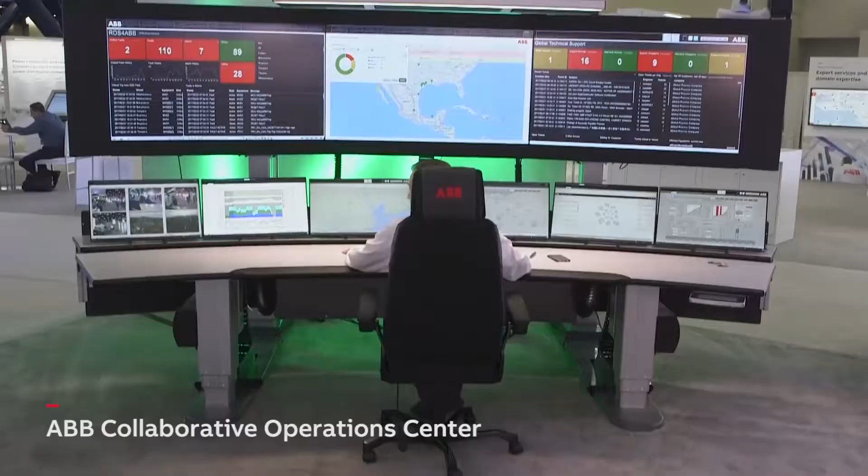What you have over here is a typical setup for our Collaborative Operations Center with our customer. He would typically be looking at the sites that he's responsible for, along with a case management system that shows him the items that are in stress, in critical state, and the assets that are in need of attention. So it's a quick dashboard.

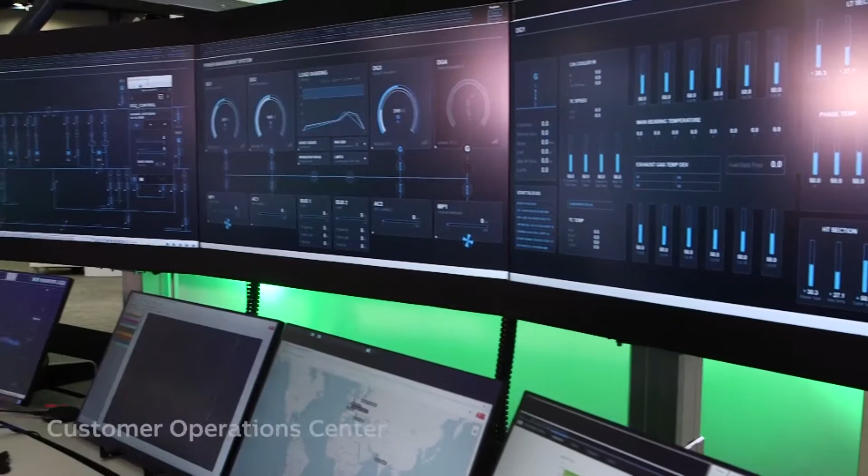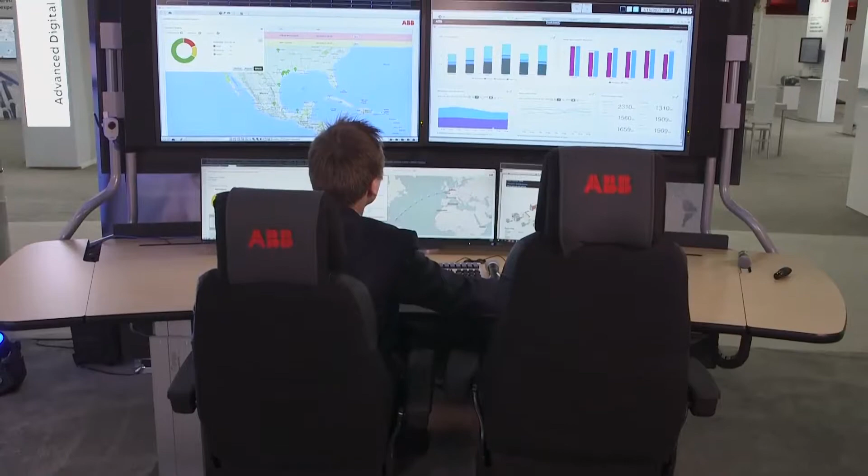That's his typical day. We have a customer site where the customer is looking at the same information periodically with ABB's help, solving the problems and getting to the root of the problem. And then we have a headquarters site where they're looking at data more about plant performance, allowing them to make decisions about moving production and optimizing their production.

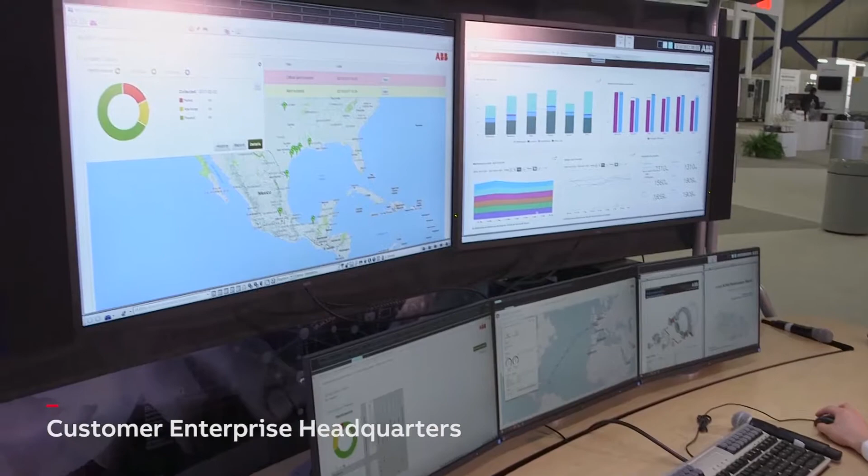We've been doing this for years. We have customers all around the world in all industries. This demonstration is generic, which would apply to any industry about critical assets.

So I'd like to take you now to another place. I'd like to take you to a world of data, a world of insights, a world of analytics. It's the Internet of Things, Services, and People. We call it the collaboration zone. So take a look.

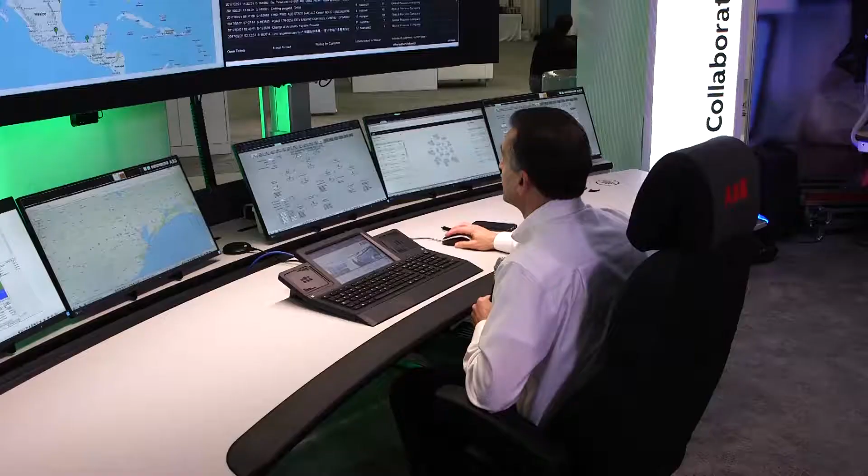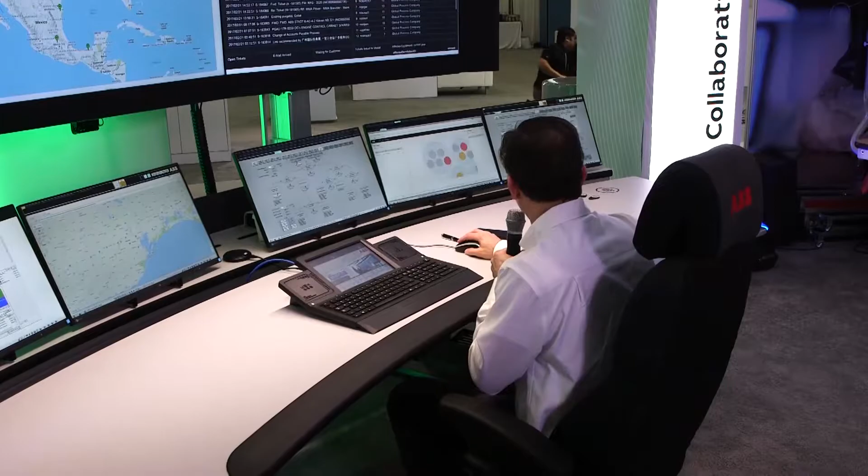Yellow level. Uh-oh. Alert on valve 301 at Global Industries. We've got a customer in trouble. Let me drill down into their system. This is strange, I haven't seen this problem before. I better call ABB to get some help.

I've got someone calling me from the site. Hello, Steve Burt, ABB Operations Center. Hi Steve, this is Kenneth from Villahermosa. I just received an alarm on my system. I hope you have the same. I'm not really able to find the root cause here. Maybe you can give me some support.

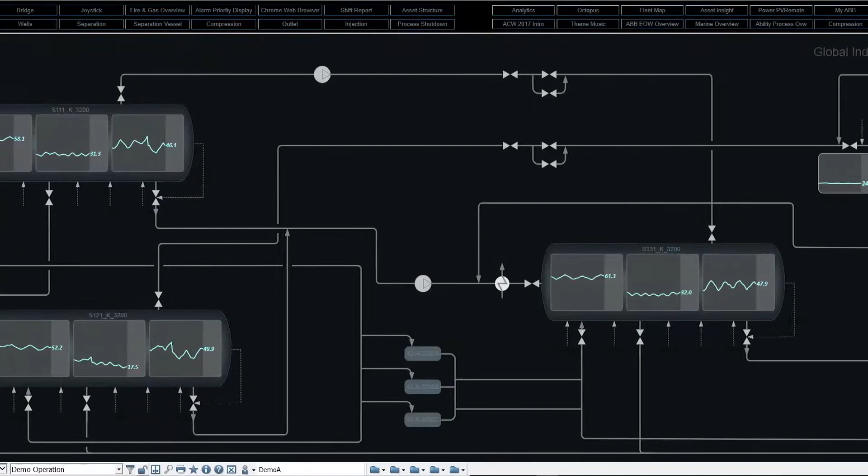Yeah, Kenneth, we got an alert here as well, and I've got your graphics up. Let's drill down into that alarm and take a quick look. Oh, you've got a valve swinging all over the place. I don't know what's going on there. I believe we have a camera on that valve, and we can call it up and do a visual inspection. So if we go over to the main screen where the valve is blinking, click on that, and go into camera view. Yeah, I'm opening up here.

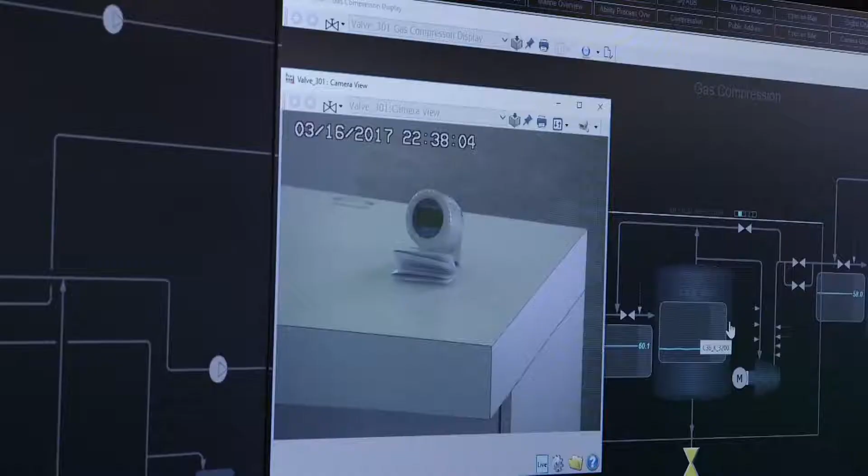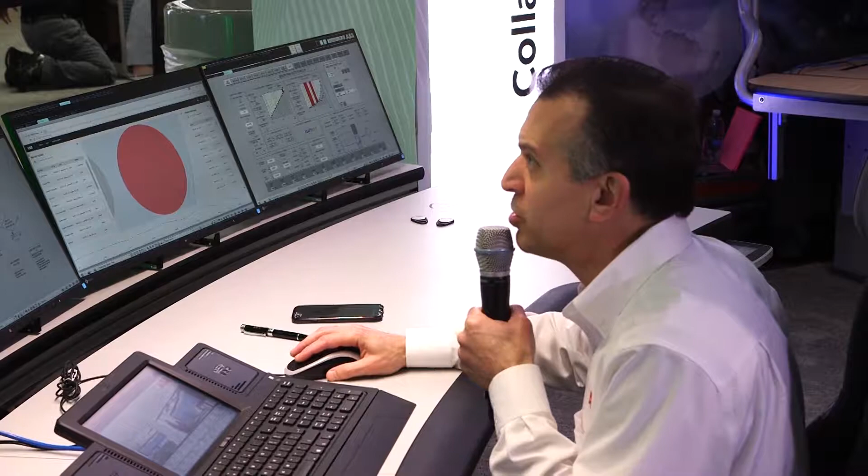You know, the valve looks all right. There's nothing outwardly wrong with it. What I can do, Kenneth, is I can get one of our service technicians in there tomorrow, take a look at it, and see if we've got to repair it or if we need to replace it. Will that work for you? Yeah, that would be great. Last time we had an issue, we were down for 2 days, and we lost millions, so we don't want that to happen. Exactly. Okay, I'll schedule that for tomorrow. Great, thank you very much.

Okay, so what you just witnessed in that first scene was a failure of a typical asset, a valve that was about to fail. And ABB and the customer collaborated and worked together to do something to prevent that failure.

But what about a critical asset? What about an asset where a failure might only occur every 5 years? We have analytics on those types of assets as well, and that's the type of troubleshooting we'll see in the next scene. Let's take a look.

Hey, Kenneth, hold on. Degradation on compressor C36 K3200 at Global Industries. Looks like we got another alarm coming in from a compressor that's downstream from that valve. Do you see that? Yeah, I can see it there as well. Okay, Leah, let's drill down into that and see what's going on.

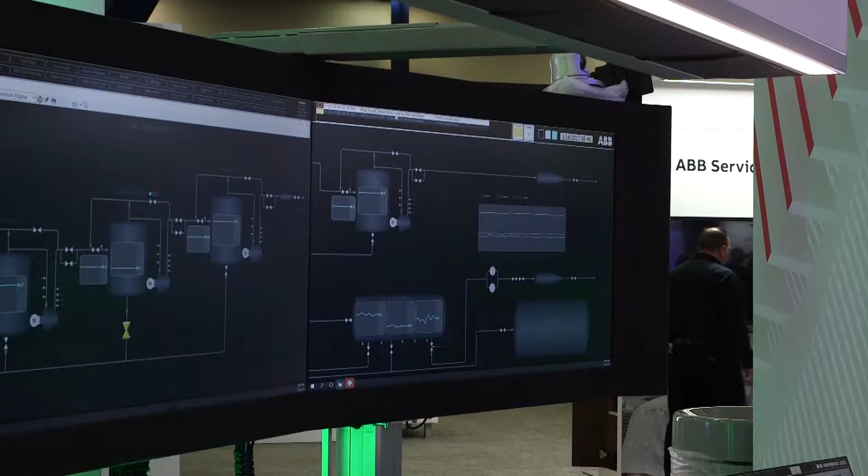Okay, let me open here. Okay, I'm opening it. Yeah, I'm looking at the performance map. It doesn't look good, it looks like it's extremely noisy. Let's go look at the asset reporter for that compressor.

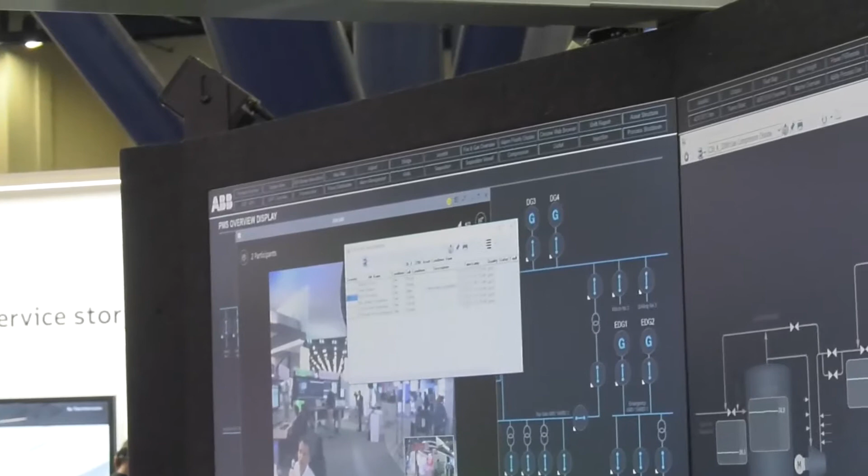You just click on the eye. Okay, straight on the graphic here. Okay, yeah, that brings up the reporter. And if we look at the main performance alarm there and click on that, we can drill down a little bit further.

Yeah, I can see it here. Condition doesn't look good. It's really running close to operational limits. I know we have some analytics on that compressor. Let me bring in one of our analytics experts who can help us with this.

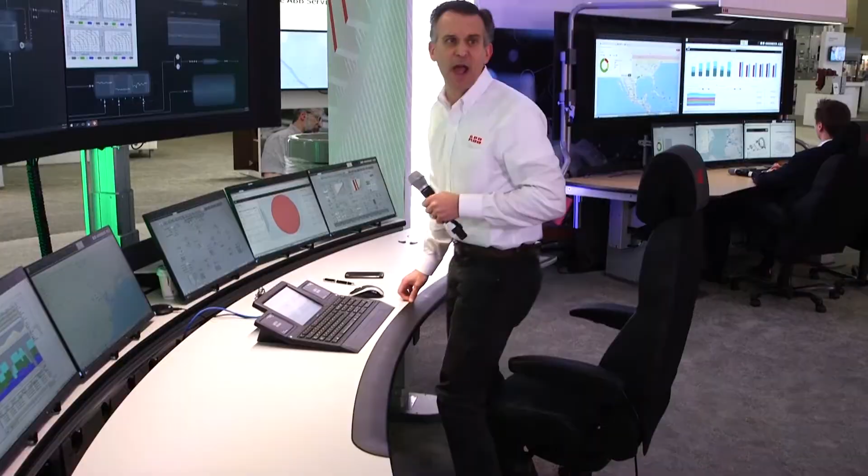I'm not as comfortable drilling down here. Can you hold on for a sec? Sure, okay, let me call him. Hey Kevin, can you come on over? Hey Steve, hey, what do we got?

I've got a problem down in Mexico at Global Industries. We've got a compressor that's starting alarm, and I'm not sure about the analytics. Can you drill down into this?

Yeah sure. Hey Kenneth, it looks like you got some issues. You've had some alarms. Now we need to dig into the analytics, all right? Now you're plugged in. Come into the analytics button and we'll take a look at that.

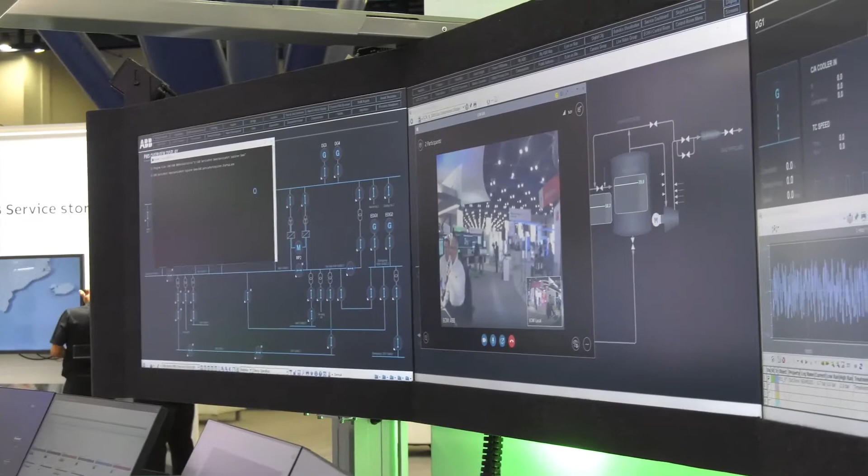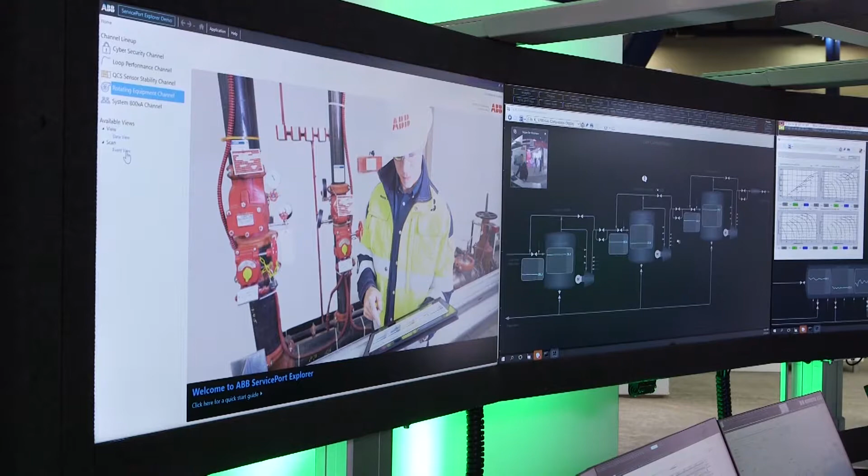We have all the high-resolution data captured, and we've aligned that with performance measures so we can ascertain what's causing this. In your case, you got a rotating equipment issue. Why don't we click on that and move over to the KPI view, the performance indices, where we can look at the profile for this particular asset class.

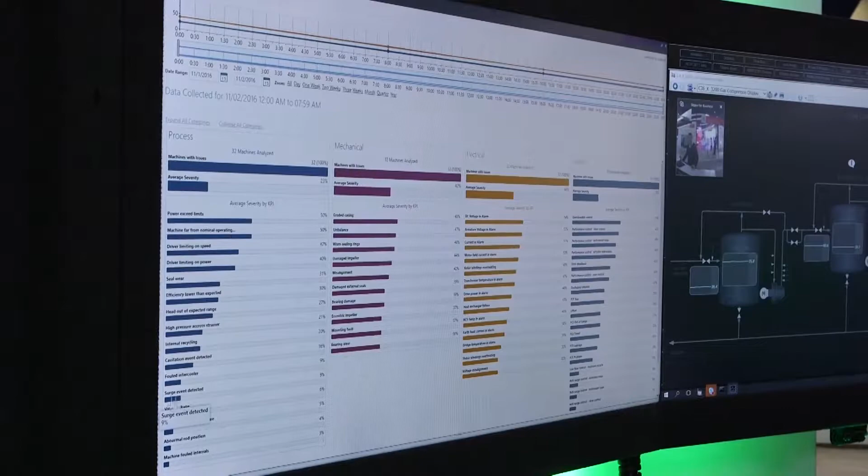Yeah, there's a lot going on here. I'm suspecting this surge event. You see that one that says surge event detected? Yeah, something about 9%. Yeah, here, that's usually at 0. I know there's a lot on here, but there's a profile, and this should be 0.

So if we click on that, it'll help us dig right into the raw data that's causing us the issues. So this first one is pegged at 100. So let's click on it and see what it shows us. This allows us to sync the data with the KPI so we can exactly see what we're doing.

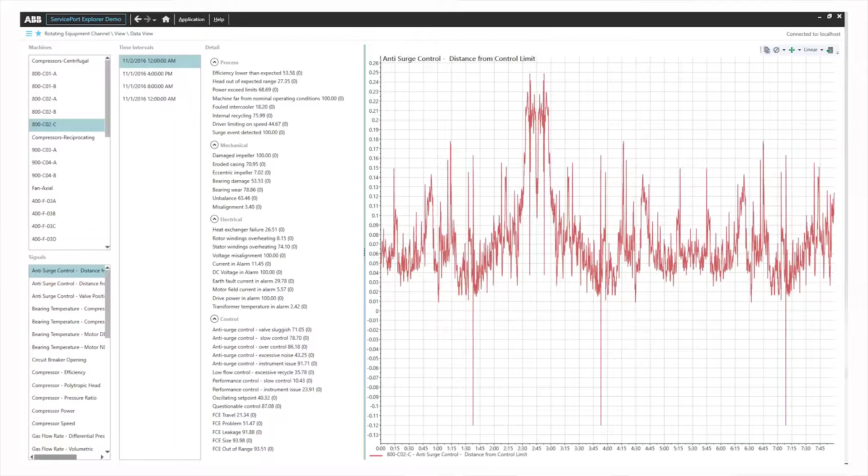Oh look at that, see this surge here? This surge in the middle, it's above the noise floor. You've got this surge that aligns with the alarm and your dots here. So that's what you're seeing. So now we know that it's true, it's not a false positive, so we don't want to be chasing rabbits.

But now let's see if we can use the data analytics and navigate to try to find the problem. Let's do some mining, so let's jump back over here to this loops channel. I'm suspecting that you've got an intermittent disturbance. That's what it looks like.

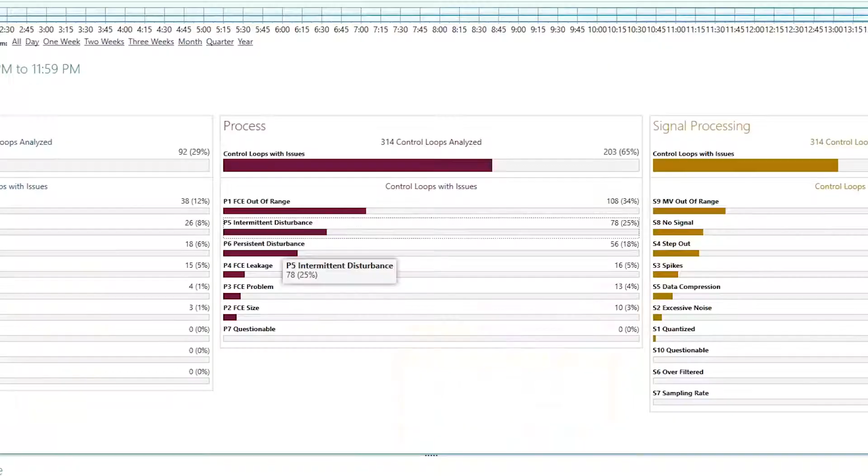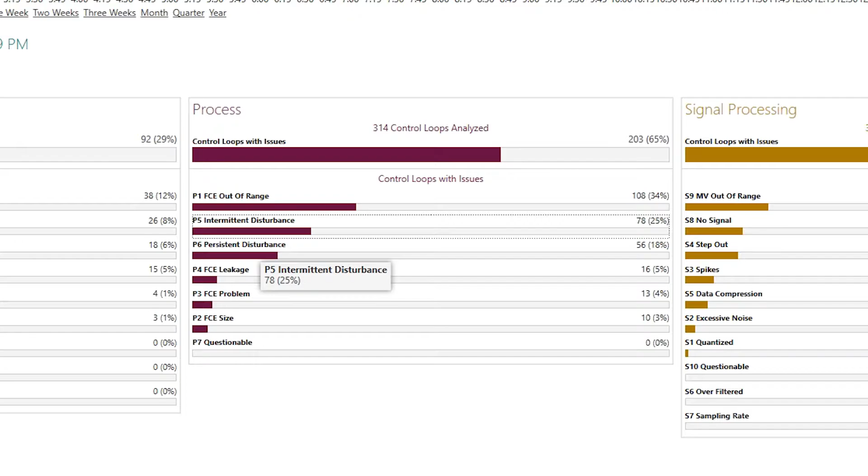So if I go to the event view, go to the process area, and that second KPI, the one called P5, intermittent disturbance, there's a lot going on here. There's a lot of shaking going on. So let's go in here, and I can see, oh looky here, this 739.

Oh there you go, Steve. That's in another area of your plant connected through a header to this particular compressor. So it's very likely someone might be messing with that loop, causing this problem. They don't even know they're doing it.

So let's, like we did before, click on that KPI and look at the raw data just to get that visual value. Yeah, look at that, it's oscillating. This is aligned with that pulse. This is causing you your trip.

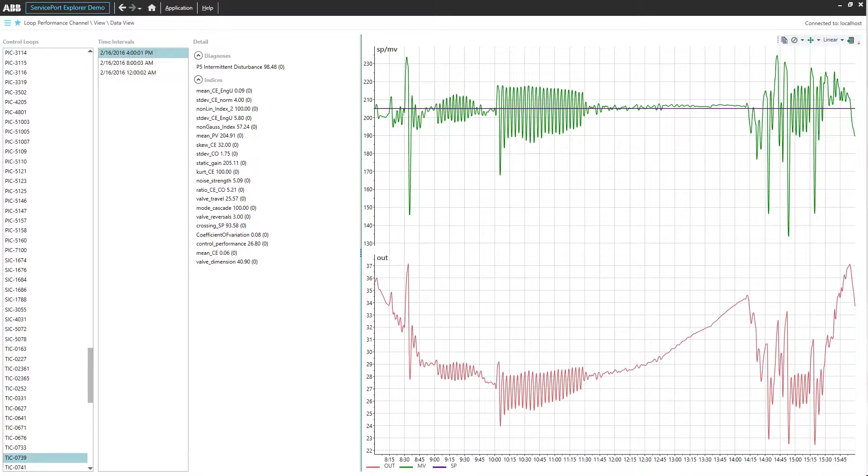So there could be something wrong with this, but you've already done a visual inspection. My guess is just somebody's flipped this loop from auto to manual. I can see you have access rights, so could you dig in there and just make sure it's in manual? And if it is, flip it back to auto.

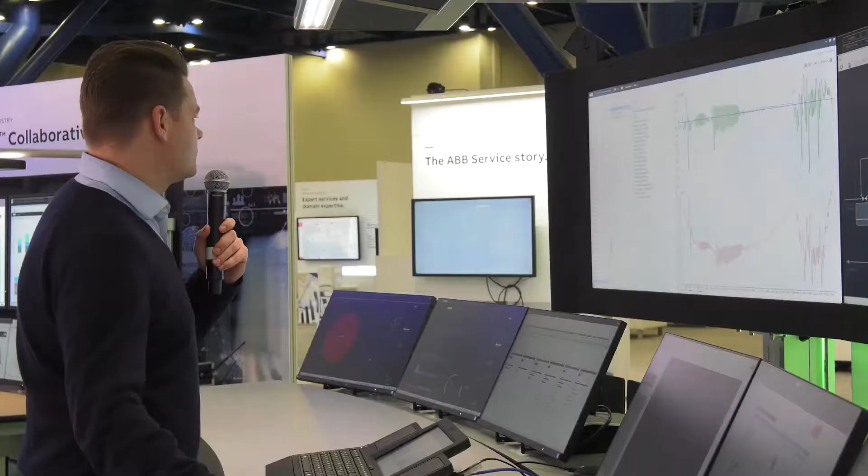Yeah, let me see here. This should be valve 302, I think. Yeah, right there, open the faceplate. Yeah, you're right, it's actually in manual mode here. Let me try putting it back in auto.

Yeah, in the old days, I'd have had to fly into site, and this would have tripped. So we've done this in seconds. Very good, hey, I see you did it, it's in auto now. Can we look at the trend? Okay, opening trend display, call up the trend display. Now we can come over here and look.

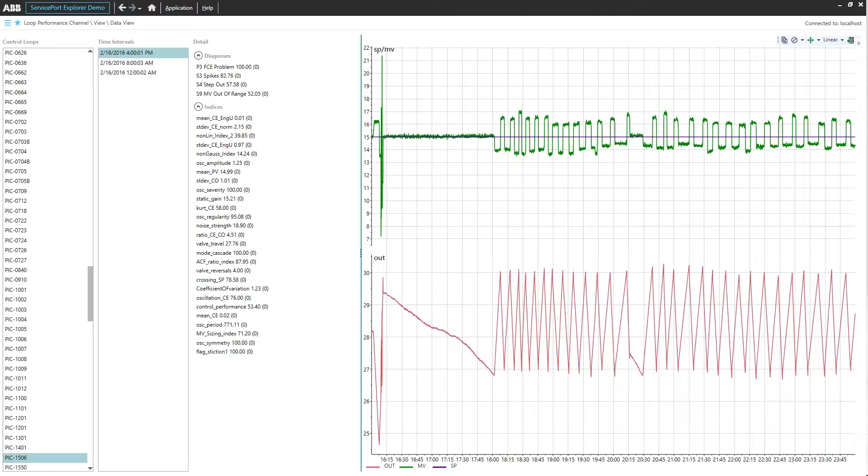Hey, looky there. That's what we like to see. You did the right thing. You called us just in time. And this is such a clear example of where you had an issue, an alarm, a related process, and a causality, and we solved it.

Let's go ahead and plug this into the predictive notification so we can capture this knowledge for the next guy. I'm also noticing as I'm poking around on your system, there's a lot of things that are wiggling around, and I really think a loop performance fingerprint would really help you guys. I see you have a contract, so let's go ahead and schedule one of those. You have over 400 assets. Let's make sure that we don't have any problems.

It sounded a great idea. You know, we had an incident a couple of weeks ago, and this we really want to be more proactive with. So, yeah, right, sign me up on that one. All right, great. Will do.

Okay, so what you just witnessed in that scene was a potential failure of a critical asset. ABB and the customer collaborated, looked at the analytics, and quickly got to the root of the problem. So they made it look easy, but the challenge behind all that was that we are analyzing the data, presenting the customer and ABB with meaningful information, actionable information, so they can quickly act and solve the problem before it occurs. So now let's flash forward two weeks to where that engineering manager and the operations manager at headquarters are

looking at data in a meaningful way for them. They want to look at plant operations, make decisions on moving production, and have a discussion based on how that plant is performing. So let's take a look at that.

So Marco, I got this notification on my phone about the compressor at Villahermosa. This worries me a bit. The last time we had a problem with the compressor, we were down for four days and lost more than two million. In fact, they had so many problems at that site last year that we were considering consolidating operations and moving production from that site somewhere else. Can you tell me what happened this time? Did they sort it out?

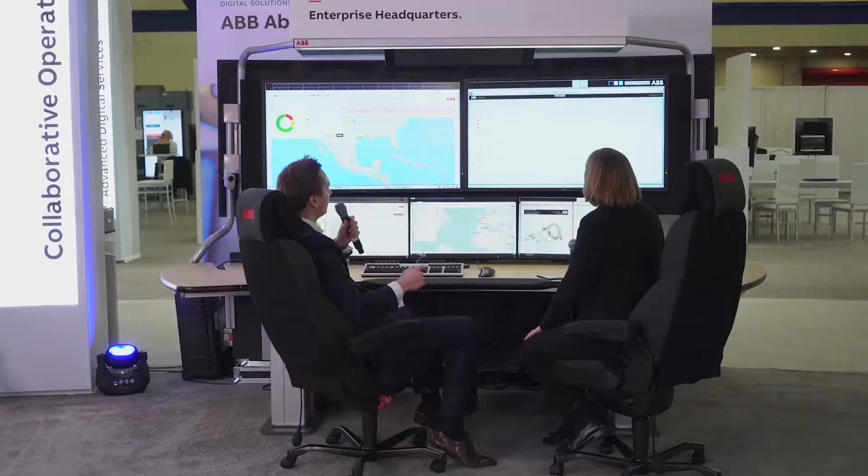Yeah, that's true. There was a predictive alarm. If you look here right now, you can see that there was a problem with one of their critical compressors. But I was in contact with their local site engineer, Kenneth, and he had it taken care of with the help of ABB. So no worries about that.

All right, great. So how are they doing at that site now? Actually, they're doing great. Let's look at the financials for this site here. You can see that the operational costs for this site are the lowest of all our sites now. And what's causing this is that their maintenance costs have been going down quite drastically in the last six months. And at the same time, both uptime and throughput are above our targets.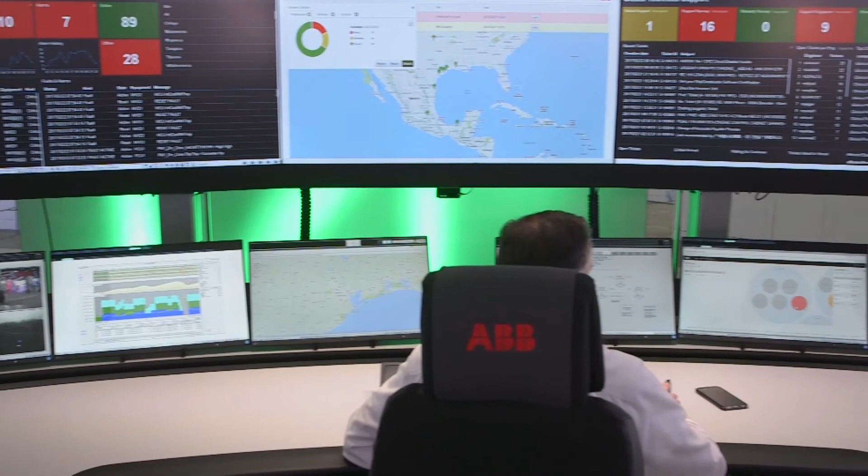So that concludes our live action demonstration of collaborative operations. And to recap, what you saw was predictive analytics being used to solve problems before they occur. You saw people collaborating and talking. You saw things happening that solve the problem before it occurs. What I would ask everyone to do is reach out to your ABB representative and see how you can subscribe to the network and be a part of collaborative operations.